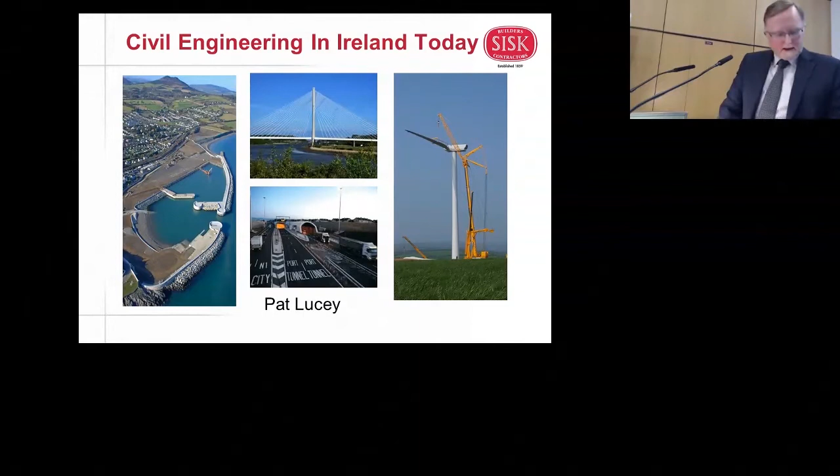If we look back to the early civil engineering achievements of our young state, one in particular sticks out. The Shannon hydroelectric scheme and the construction of Ardnacrusha power station. Opened in 1929, in today's terms, this was a scheme of Crossrail proportions. 8 million tonnes of material excavated during construction, 1.2 million cubic metres of rock blasted and removed. It generated huge employment during construction, and the completed project played a pivotal role in the development of our nation. The vision came from a young Irish engineer, Thomas Anthony McLaughlin, who had the technical capacity combined with the drive and initiative to gain the support of his employer, Siemens, and to convince the politicians of the day.

Where did we get the courage, 5 years after the founding of the state, to embark on such a large construction scheme? It wasn't without debate. Other schemes were proposed as well. How were we able, in 1925, to get through the debate, overcome doubts, and move with confidence to provide infrastructure that was key to the building of a young nation? I'll come back to that point later on.

This project generated huge public interest, with people travelling from all over the country to view the works. It was estimated that 250,000 people were guided through the works during construction. In 1925, the expertise had to be imported. Specialist equipment had to be imported. Locally, we had the raw materials and the labour force. The vast majority of the workforce was Irish, but the controlling minds were experienced international personnel.

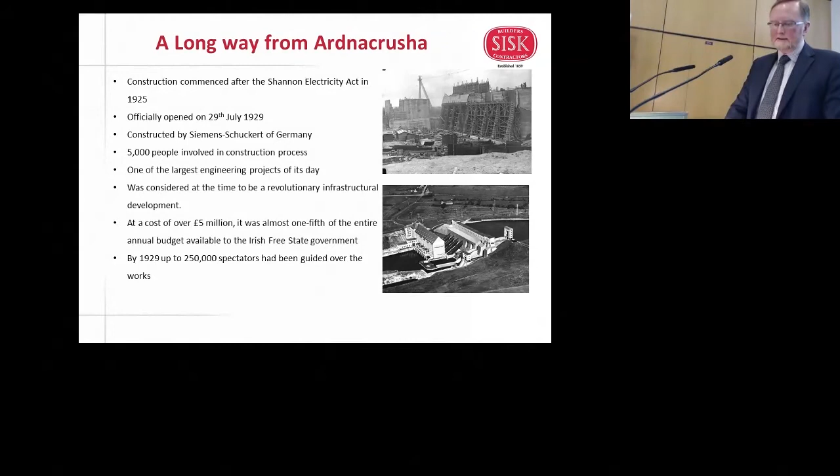Only in recent decades have we begun to plan on a national basis how to address the deficits and the future needs of our infrastructure. The country had suffered for many years from lack of investment in road, rail, water, wastewater, etc. It's hard to believe that road fatalities in the 1970s were close to 600 per annum. In 2012, there were 162 fatalities. In 2013, there were 190 fatalities. The reduction wasn't all down to engineering and construction, but it did play a significant part. That job isn't finished. More improvements are possible.

Before we had a national development plan, improvements in the road network were piecemeal, one-off projects dealing with congestion hotspots. The vision to see beyond the immediate infrastructure needs was not a national priority. Nevertheless, the projects that were carried out allowed the organic growth of the civil engineering industry. Joint ventures with international partners were used where appropriate. Through these joint ventures, the national industry continued to learn and the competency continued to grow. There were, however, some examples of localised visionary planning.

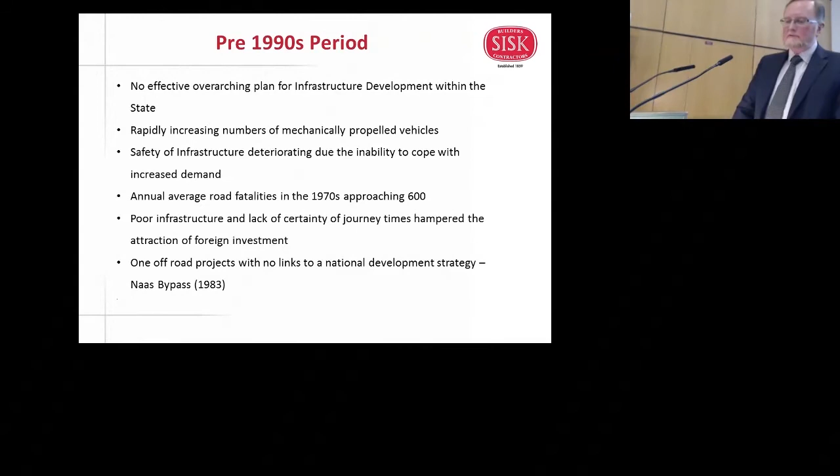A land use and transportation study was produced in the late 1970s for the Greater Cork area. It was a 25-year plan for the growth of transport and land use. The cornerstone of the plan was the proposed downstream crossing of the River Lee. This is the crossing we now know as the Jack Lynch Tunnel. The LUTS report was the combined effort of the relevant statutory authorities. After publication, a high-level technical steering committee lobbied for this future vision of the Cork area.

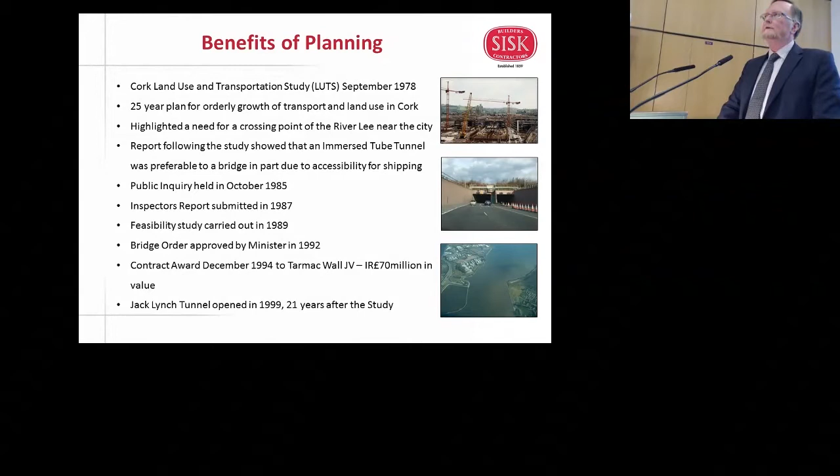The timing was right, and the plan fed into the National Development Plan of 1989 to 1993. Not everything was achieved, but the principal elements were implemented. This is a further example of drive and commitment to achieve a far-reaching vision. The Jack Lynch Tunnel was the first immersed tube tunnel constructed in Ireland. Completed in 1999, it was another milestone in the development of civil engineering in Ireland today. The 20-year duration from concept to completion is typical for major infrastructure works.

The Jack Lynch Tunnel benefited from the availability of EU funding. It would not have been in a position to apply for those funds if the planning process had not commenced years in advance. This brings to mind the term shovel-ready projects. Every time a recession draws to a close, there is a demand for shovel-ready projects to kickstart the economy. The process that has to be followed to bring a project to the stage that construction can commence quickly requires careful planning. For those of you with the ambition of a career in politics, please remember, when you achieve that ambition, that shovel-ready can be achieved, but it needs vision and planning.

The formation of the National Roads Authority was a milestone for progressing the infrastructure that is our road network. National development plans were produced, priorities were established, and the focus was very much on achieving the NDP targets. The NRA recognised that improvements could be made to the execution model, and by that I mean the procurement and construction of their projects. Traditional build-only, design and build, public-private partnerships and early contractor involvement were all utilised to deliver the roads programme. The NRA consulted with the CECA when developing new models of procurement and construction. That collaborative approach brought many step changes in procurement, which were adopted seamlessly by the industry.

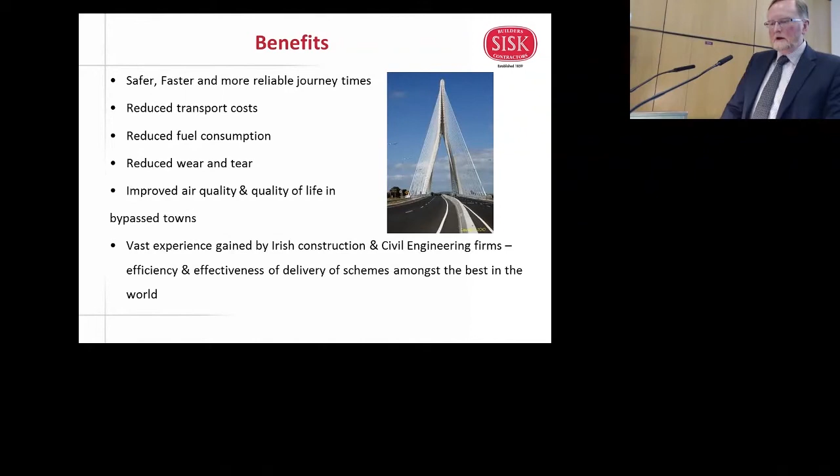Working in any new market is a learning experience, and our civil engineering industry has learned from working overseas in recent years. By the industry, of course, I mean the people, and the people have benefited from the wider experience and continued their professional development, without necessarily changing employer, at a time when the home market was stagnant. As the home market improves, opportunities are generated for staff to return, and therefore the industry, as it now stands, retains the competence for the safe delivery of quality infrastructure. This rising tide also provides opportunities for graduates.

This is a CSO graph of civil engineering production from 2006 to 2013. This is a comparative value index using 2010 as the base year. As you can see, production was at its lowest in 2011 and has been rising since. If we had a graph covering the last 30 years, it would show the cyclical nature of civil engineering, which is inextricably linked to overall national economic production.

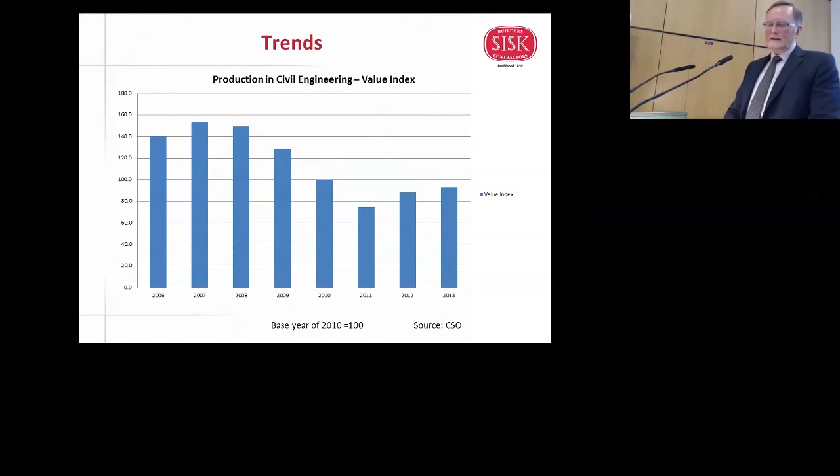As the CSO graph indicated, the civil engineering sector is recovering slowly. The skilled workforce is gradually returning to meet the demand, and the capability to deliver economically and efficiently still exists. There are projects in the pipeline that can be brought to the market quickly if there is a positive decision to invest. In 1925, we were able to overcome doubts and invest in a project that changed the country. The vision present for that project and others is sometimes missing. Maybe we don't always see the many positive benefits from investing in infrastructure. Take employment, for example.

While the figures are finally heading in the right direction, they are still significantly higher than the 2000 to 2007 figures of less than 5%. In order to create employment within the civil engineering industry and the construction industry in general, significant investment is required. There is, however, a return on that investment for the public purse over and above the value of the infrastructure created.

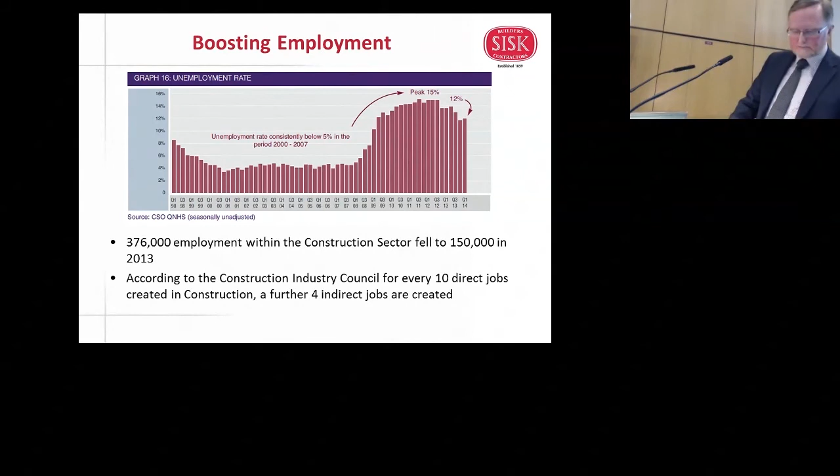In simple terms, depending on the project, for every 100 to 130,000 euros certified to a contractor, one job for a year is created, either directly on the project or in the immediate supply chain. The investment in a capital project has a far-reaching effect and can prove a significant boost to the economy of an area, in addition to the benefits of a completed project at the end of construction. There is wide agreement on this, and many industry organisations have published recommendations for investment in construction that will further stimulate the wider economy.

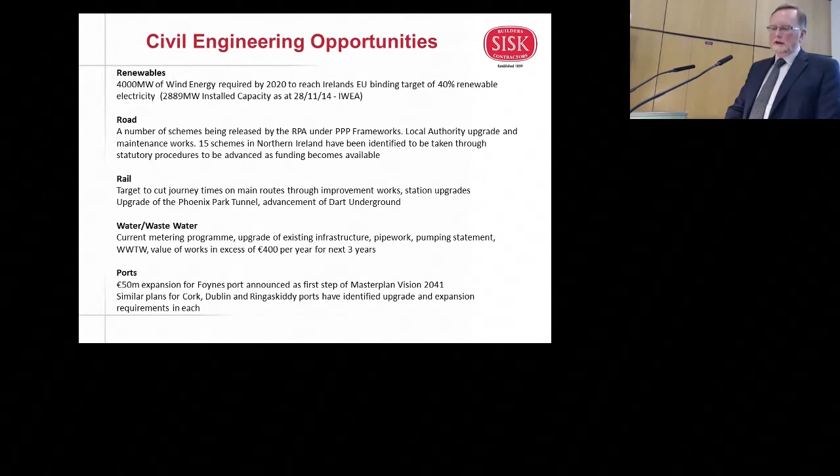Despite the progress made in improving our infrastructure, there is still much to be done. To achieve the target of 4,000 megawatts of wind energy by 2020, another 1,000 megawatts needs to be brought online. The NRA have 12 major projects with planning and another 6 going through the planning process. Irish Rail are looking to respond to the improved road travel times by reducing the Dublin-Cork rail journey to under 2 hours and the Dublin-Belfast rail journey to under 90 minutes. The much talked about Phoenix Park Tunnel will be upgraded for passenger trains, and the business case for the DART Underground is being updated. DART Underground is an exceptional scheme that will bring huge benefits to the capital. Irish Water is looking to spend 400 million euros each year for the next 3 years, and many of our ports have major plans for upgrade works. So the future should be bright if we have the vision to push ahead with these improvements.

With the knowledge, experience and skills developed over the recession period in new international markets, the civil engineering sector in Ireland is ideally poised to deliver greater innovation, efficiency, cost certainty and a higher standard of product than ever before. It is vitally important that all of the parties involved in the delivery of a construction project, from the concept stage through planning, procurement, design and construction and operational phases, all work together. This will allow the industry to grow to ensure that the needs of our improving economy can be met in a sustainable manner. Greater collaboration between clients and contractors has always been rewarded with success.

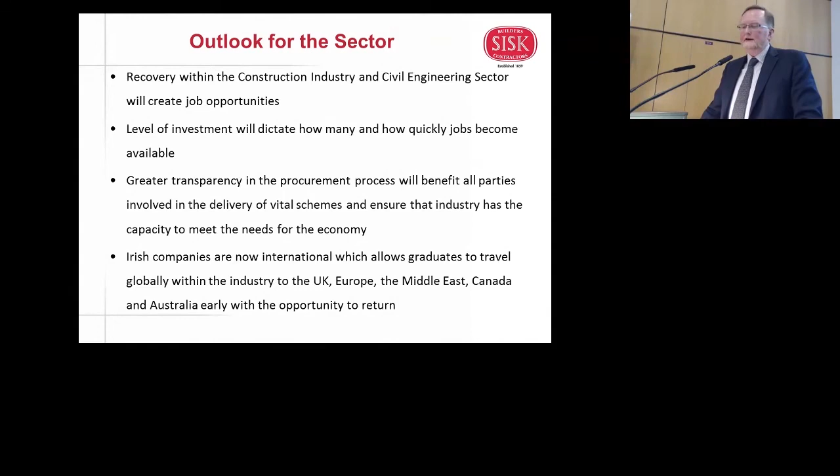For those of you that are coming to the end of your studies, your timing is pretty good. We do see a recovery and the job opportunities that go with that. The bravery of our decision makers will dictate the level of investment. Hopefully, we will see some 1925 visionary leadership that will push ahead with the current pipeline of projects and commence the planning for the future. The capital spending programme is due shortly. Let's see what that brings. Irish civil engineering companies are now working internationally, and as a final message to forthcoming graduates, don't be afraid to travel with your work. It's a good experience. Thank you.